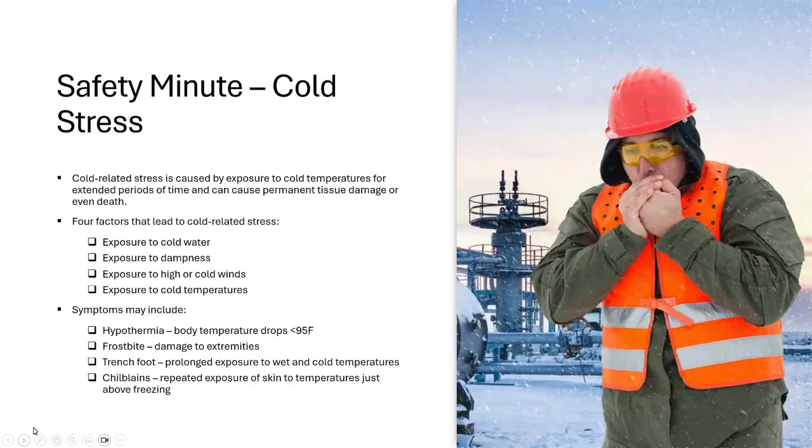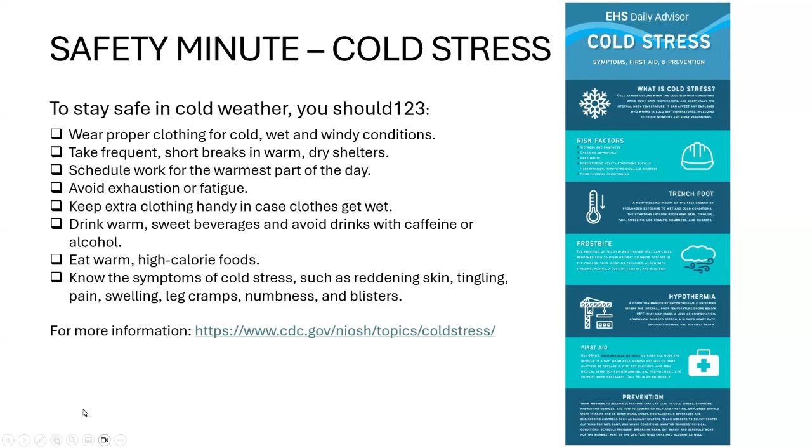Okay, so the Gowanus Canal is in the heart of Brooklyn. It's 1.8 miles long, and on average about 100 feet wide. It opens up into Gowanus Bay on one end and dead ends at the other end, which has always been an issue for the canal. So it is subject to tidal exchange, but it doesn't flow. It's not a complete flow-through system, so there is more potential for stagnation of water.

There are 7 bridges or viaducts that cross the canal, and it's generally been recognized as one of the most polluted bodies of water in the US, with a host of most of the types of contaminants you may have heard about, including volatile and semi-volatile organics, PCBs, pesticides, and metals.

There's an interesting history. The canal was created in the middle of the 19th century. Just a quick anecdote: a lot of people don't realize that Brooklyn wasn't always part of New York City. Back prior to the early 1900s, on its own, Brooklyn was the 3rd largest city in the US before Brooklyn and Queens became boroughs as part of New York City.

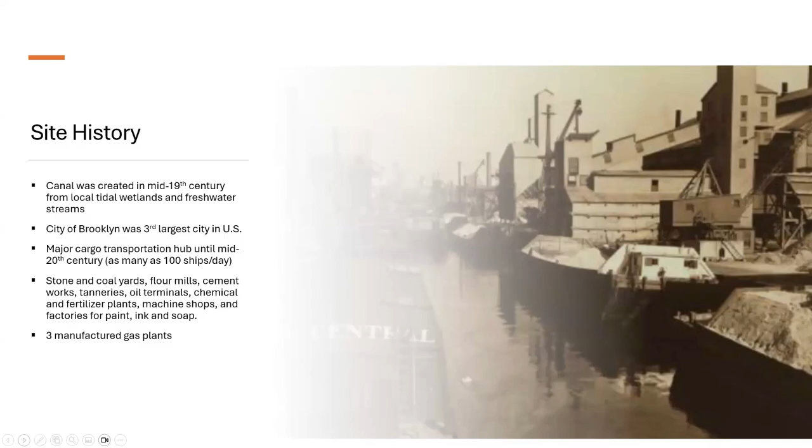Just a little bit more on the site history. Over 50 industries were located along the canal in 1942. There were 14 combined sewer overflows, or CSOs.

CSOs are associated with older sewer systems that you see in older cities, where the sanitary flow and the stormwater are not separated. So during rain events, you get a tremendous increase in flow through the system. It's too much volume for the wastewater treatment plants to be able to treat, so the flow goes over a weir and discharges untreated into a water body like the Gowanus Canal.

Over the years, from both the CSO discharges and the discharges from all the industry along the canal, the sediments in the bottom of the canal became quite contaminated, forming a gooey black colloidal mixture that is often referred to as black mayonnaise.

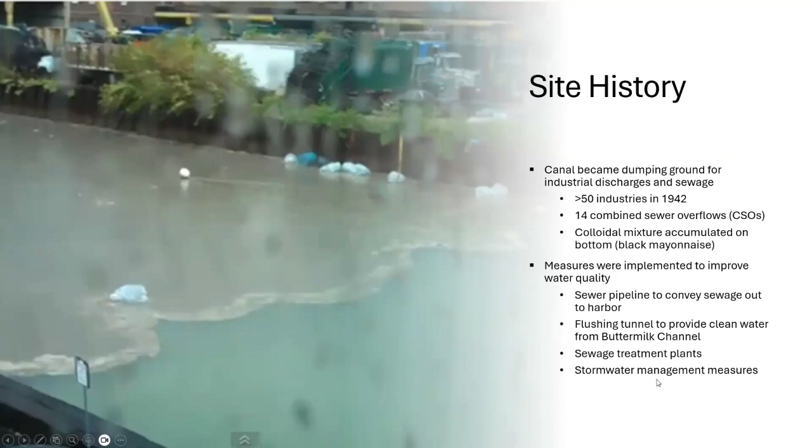Over the years, there were a number of measures implemented to improve the water quality. Sewers were put in to take sewage that used to go untreated directly out to the harbor. There was a flushing tunnel at the head end of the canal that was put in to bring clean water into the canal and help mix that in. There were upgraded sewage treatment plants constructed, and there were stormwater management measures implemented.

I'm going to move on to give you a sense of the regulatory status of the canal. In 2009, EPA proposed listing the canal on the National Priorities List under Superfund. For the next few years, there were investigations and feasibility studies conducted by EPA's contractors, which led to EPA issuing a Record of Decision in 2013 that lays out what the remedial measures are to address the historic contamination in the canal.

The canal was divided into three sections called Remedial Target Areas 1, 2, and 3, starting at the head end and working out to the bay.

The major elements of the remedy included dredging the contaminated sediments from bank to bank, stabilizing and solidifying non-aqueous phase liquids, which are primarily coal tar residues from the former manufactured gas plant sites, as well as possibly some other non-aqueous phase liquids resulting from historic discharges from industrial dischargers. That would be in the native material below the soft sediments after they're dredged out.

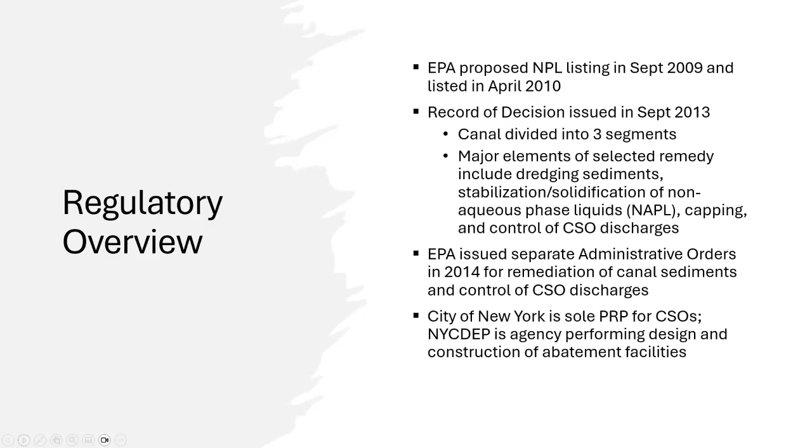EPA issued some administrative orders to implement the Record of Decision, and as I mentioned, the city is the lone responsible party for addressing the CSO discharges.

The remedy for the CSO discharges includes designing and constructing two large retention tanks. The concept being that when wet weather occurs and the flow through the combined sewers is too great for the treatment plant to handle, rather than the excess flow being discharged untreated into the canal, it'll be rerouted into these large holding tanks.

Once the rain subsides and the treatment plant has the capacity to take the additional flow and treat it, it can be bled back off from the storage tanks and sent to the treatment plant.

The remedy called for two tanks: an 8 million gallon tank near the head end of the canal and a 4 million gallon tank around the midpoint of the canal.

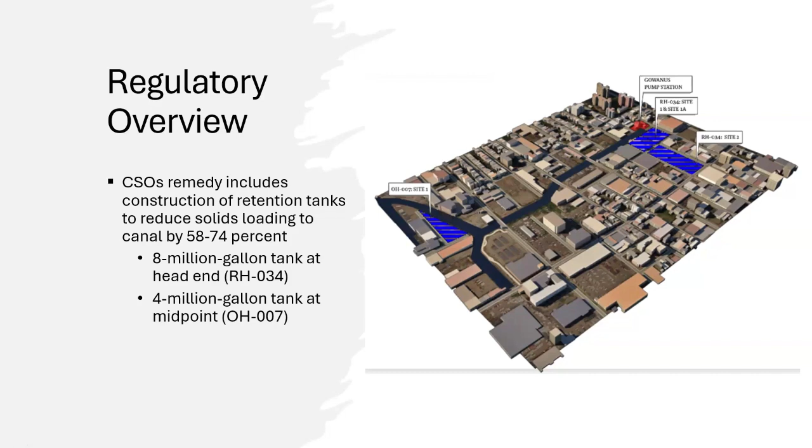From here on out, I'm going to focus on the head end facility, which is further along in the design and actually partway through construction now.

The DEP entered into a consent order with EPA in 2016 that laid out specific milestones for design and construction of the remedy at the head end, which is referred to as the RH034 facility. That's just the designation of that CSO outfall.

As I mentioned, there were stipulated milestones for design submittals, for the city to acquire land as necessary to build the facility, and to implement the required remedy.

It turns out that the preferred site for this facility is on the location of one of the former manufactured gas plant sites. National Grid, the current utility, has responsibility for cleanup of the former MGP sites.

So they are working with the state agency, the Department of Environmental Conservation, to perform remediation for the former MGP site. Some of the activities between the CSO facility and National Grid's remediation overlap, adding complexity to the project. The parties had to cooperate and work together on various elements of the project.

Going to quickly walk us through the design process. The New York City DEP has a very SOP-driven, very detailed design process, as you could imagine, for these facilities that are going to be put into use to protect the public and are going to last for 100 years or more.

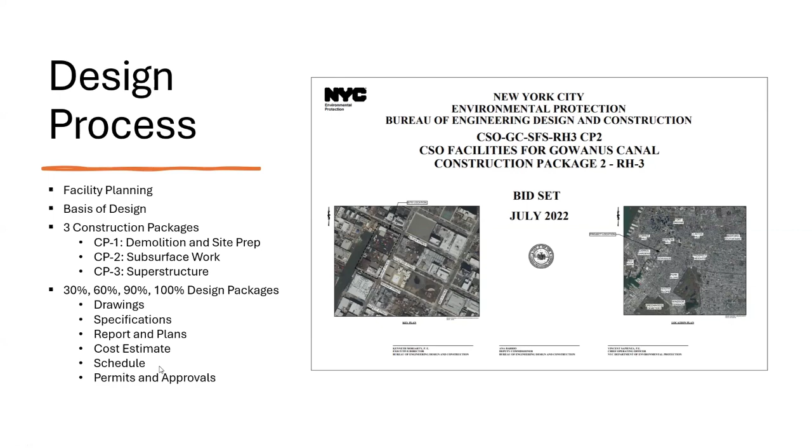So the goals of the project were developed early on, and that included designing the facilities to be compliant with regulatory requirements, making them safe and efficient to operate, making sure that the facilities are consistent with the character of the neighborhood and meet the desires of the community stakeholders, and then to design them to be sustainable and to meet today's requirements for sustainability, which I'll be talking about more as we get further into it here.

So the reason it's designed in sections rather than just being one large tank is that the majority of the flows during a given year might only be enough to fill the first or the second chamber, and therefore it reduces the maintenance requirements rather than letting the entire tank fill up every time that there is an overflow into the tank.

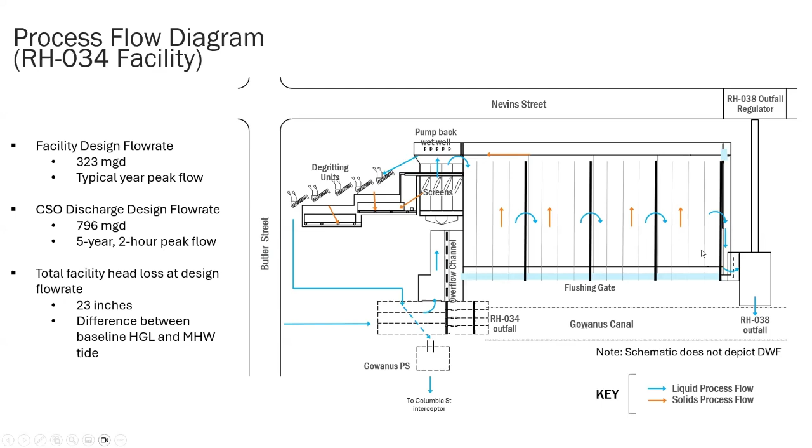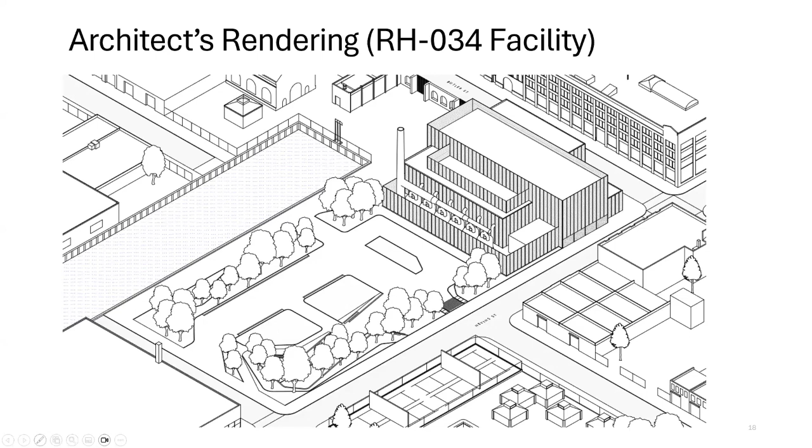And this is another artist's rendering. You can see the brick structure tying into the existing pump station and trying to be consistent with the character of the neighborhood.

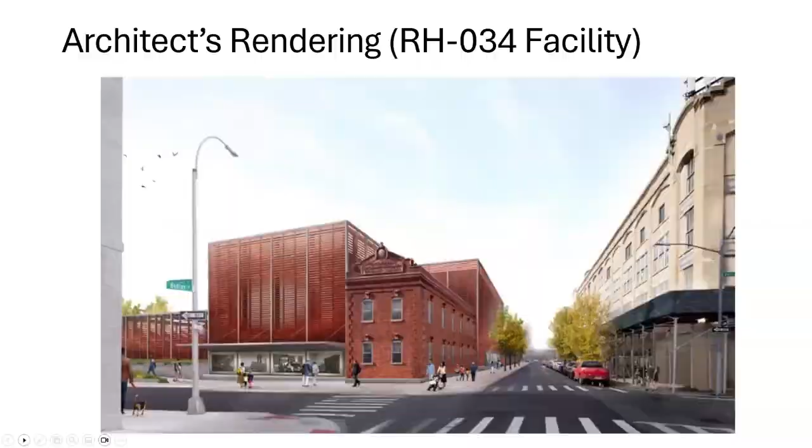All right, so going to quickly go through the remediation scope here. In order to construct the tank, it is necessary to first build a support of excavation before the mass excavation can be performed and the concrete can be poured to construct the tank. We call a support of excavation an SOE. In this case, it's a slurry wall construction that goes all the way down 200 feet and ties into the underlying bedrock. And then it also forms the outer walls of the tank when it's constructed after the slurry wall is completed.

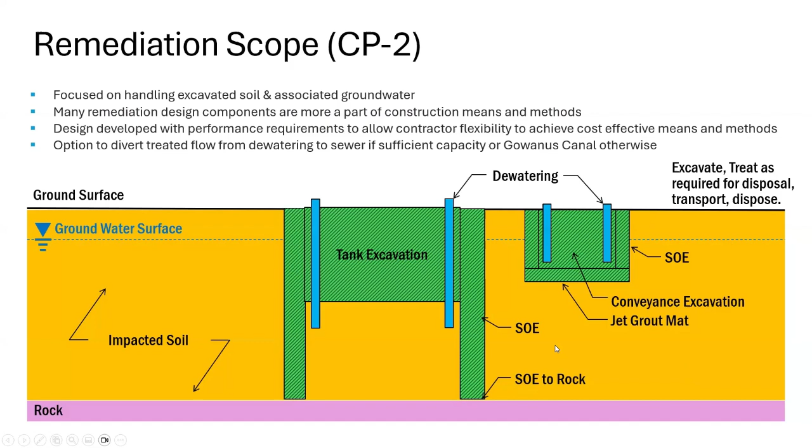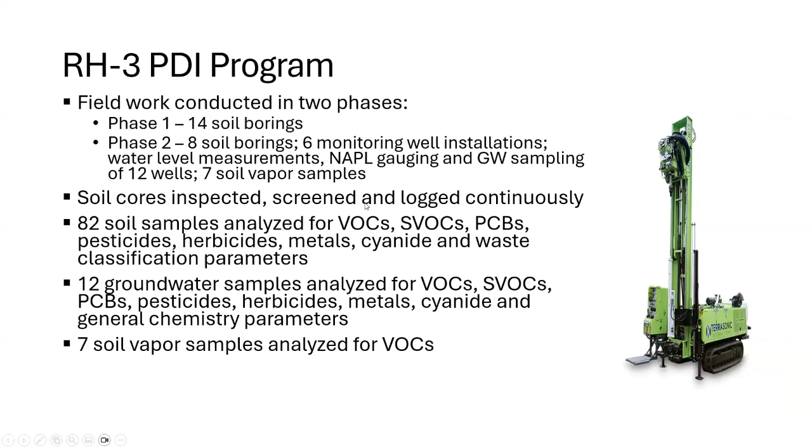We're working on a contaminated site, so we're surrounded by impacted soil and contaminated groundwater that has to be managed. So it's not your everyday construction project, to say the least. So we first conducted a pre-design investigation that was a fairly extensive investigation to characterize the contamination in the soil, groundwater, and soil vapor. The main constituents are material associated with the former manufactured gas plant site.

So if you've never seen coal tar, it's similar in some respects to the creosote that you see used to treat telephone poles. Very thick, viscous liquid that was generated in large quantities by these former MGP sites, and much of it ended up in the subsurface and in water bodies, back in the days before we had the sort of environmental regulations and best practices that exist today.

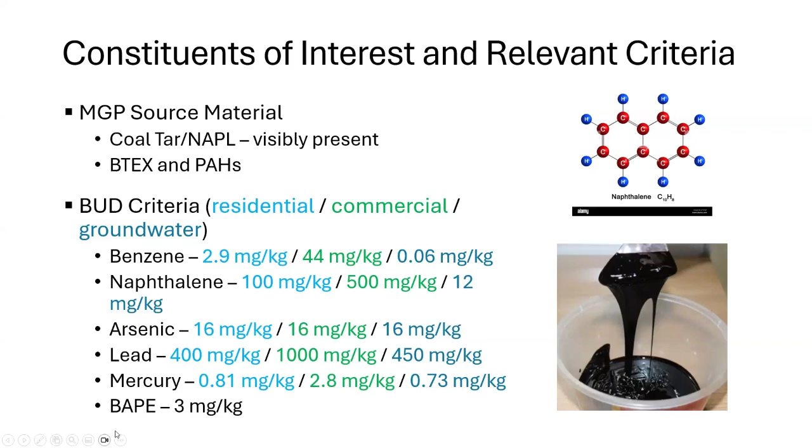The light blue being the most stringent criteria that would have to be met for the soil to meet residential use criteria. The green would allow for commercial use, and the darker blue here is for protection of groundwater. And I'll just keep moving through here so we have enough time.

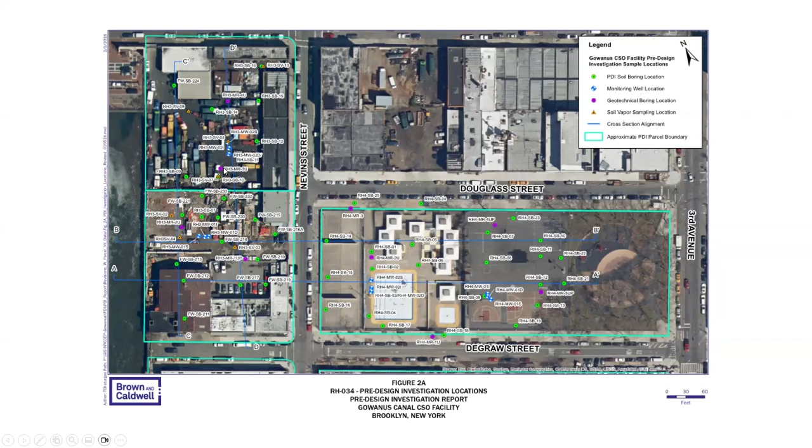to acquire it. However, DEP was very reluctant to take over the park in order to build this facility, because it was the only park anywhere nearby in that part of Brooklyn. And in order to acquire that property for the facility, they would have had to find a new location and build a whole new park with a new public swimming pool and all the facilities and such. And ultimately, DEP was able to acquire the preferred parcel, and we were able to focus the rest of the work on that location.

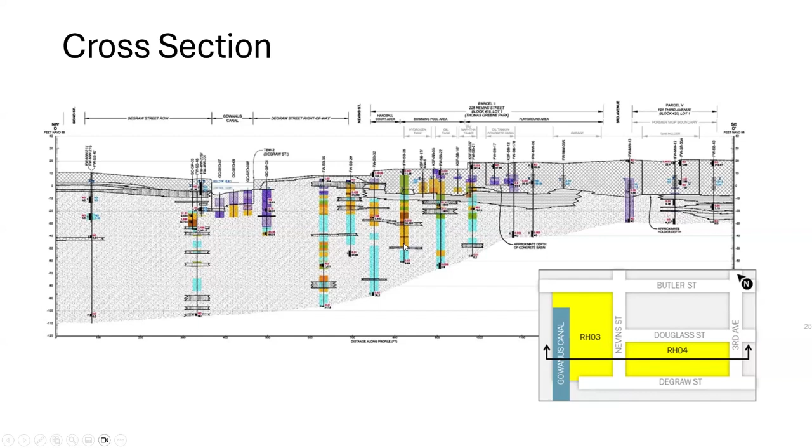This is just a cross section that shows the contamination in the subsurface. The darker reds and browns are where we encountered separate phase product, coal tar from the former MGP operations. And then the contractor, when mobilizing to the site, had to do their own additional investigations. So they drilled borings all around the perimeter of the tank where the support of excavation would be constructed. And you can see the red locations are where coal tar was encountered. So mostly concentrated on the southern end of the site, not so much on the northern end of the site.

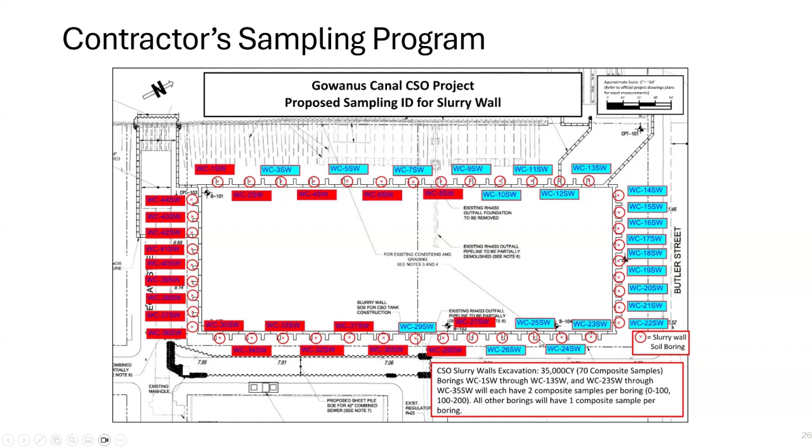And then they also gridded the interior where the soil would be excavated to construct the tank. And similarly, southern end of the site, most of the locations showed the presence of coal tar, whereas the northern part of the site did not.

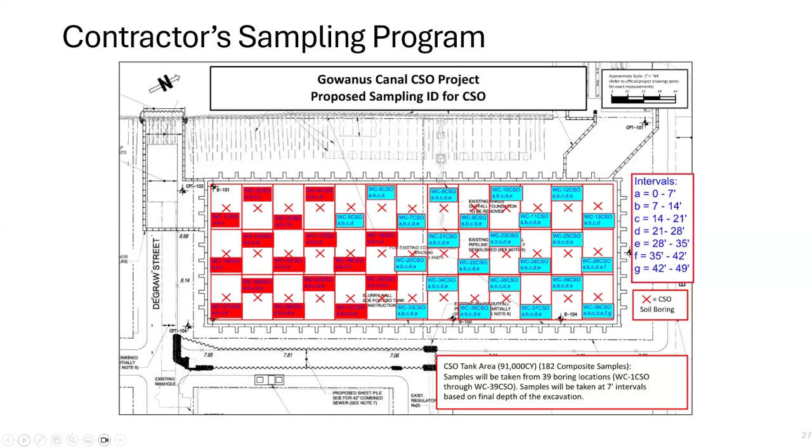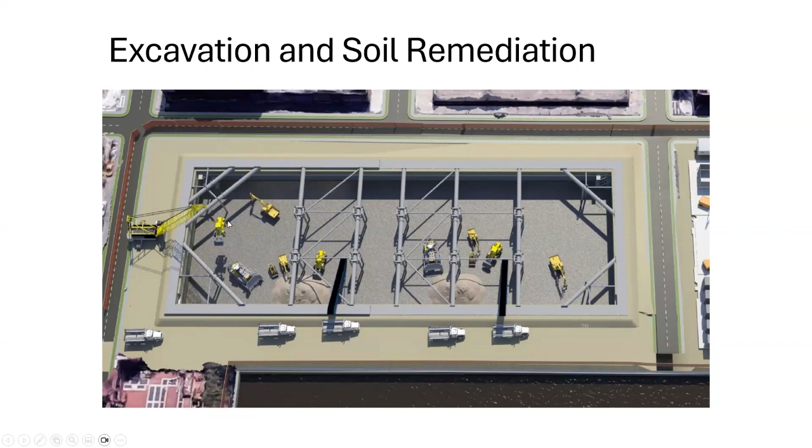We did some 4D modeling and looked at the feasibility of implementing the construction and how it would need to be done. This is just a still shot from that. You can see part of the design of the support of excavation includes this bracing, these cross-lot struts. So another complexity is having to work within these constraints to work down in the area and to do the excavation and to get the soil up out of the excavation.

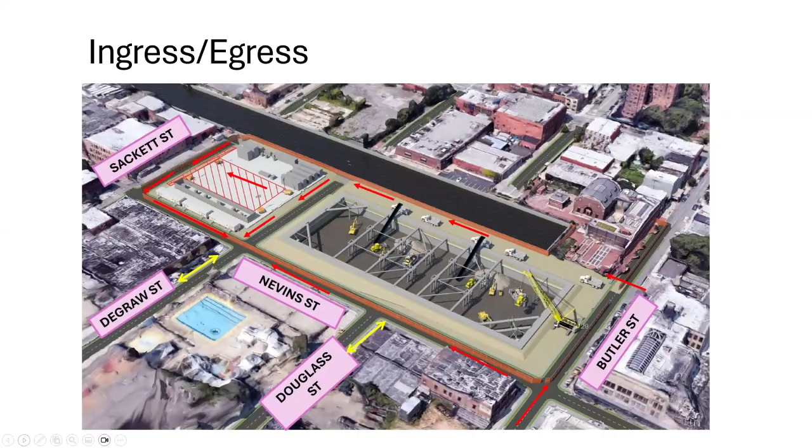And this just shows kind of the flow around the site, so the excavation work would be occurring in here. Trucks would enter along the side of the canal. There's a soil staging area over here. So all those logistics had to be worked out. It's a very congested part of Brooklyn. The streets are narrow and filled with parked cars, and very difficult for construction equipment and dump trucks to get in and out of the site.

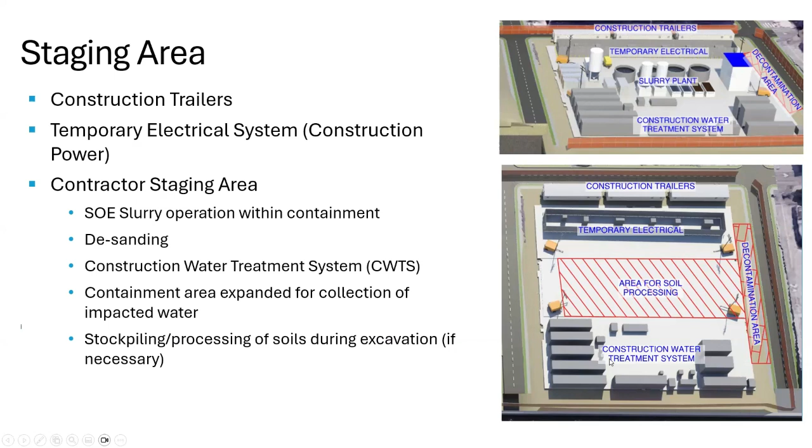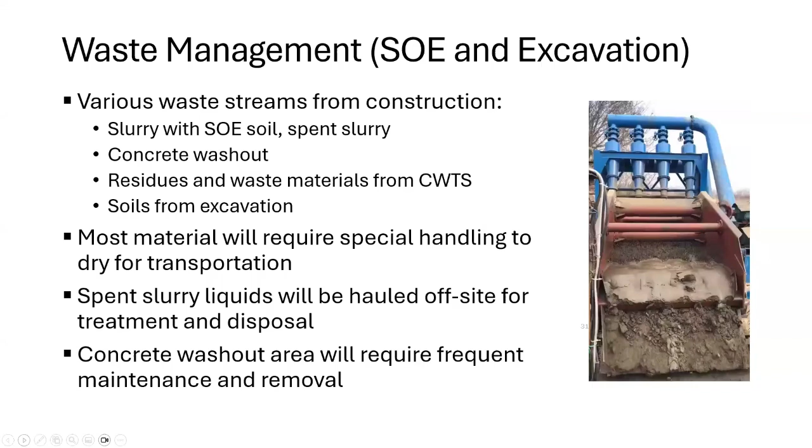That's just a picture of what the spent slurry looks like coming off of the slurry desanding unit. The slurry gets recycled. It's used to keep the trench open while you're digging and constructing the support of excavation, and eventually the spent slurry needs to get disposed of. So part of what we had to plan for was managing these various waste streams. Most of the material requires special handling to dry it before it can be transported off site. And I'll talk more about that when I get into the sustainability section shortly, but we looked at a lot of options for potential reuse of the material, avoiding putting it in landfills if at all possible.

So that's kind of everything leading up to here, where I want to talk now about some of the sustainability considerations. So there's actually quite a bit of supporting local laws and plans and guidance in New York City for sustainability. There's requirements from the mayor's office, PlaNYC 2030 and OneNYC.

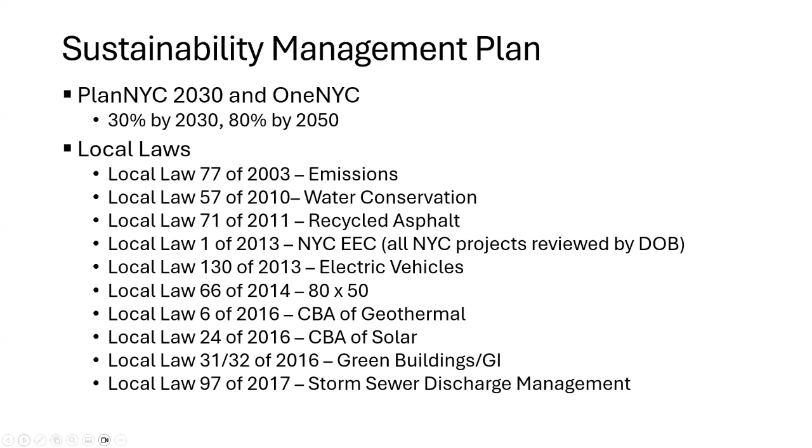There's a number of local laws that deal with emissions from construction equipment, water conservation, recycling of materials, utilization of electric vehicles, renewable and more sustainable forms of energy and the like. And then BEDC, which is part of New York City DEP, it's the Bureau of Engineering, Design, and Construction, has their own standard operating procedures.

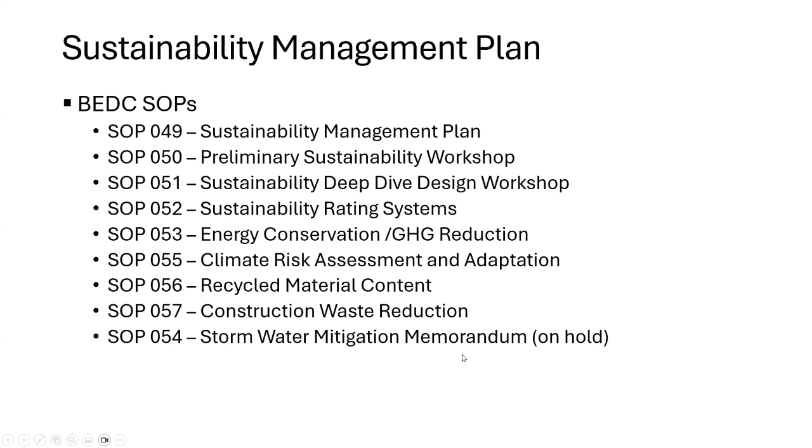So every project needs to have a sustainability management plan prepared. That plan gets workshopped with all the various stakeholders. There's rating systems. There's certain requirements for energy conservation, climate adaptation, use of recycled materials, reducing waste, stormwater mitigation. So some of you may be familiar with the Envision program, which is very popular these days. There's also LEED, which is similar. Envision seems to have gained a lot of popularity recently.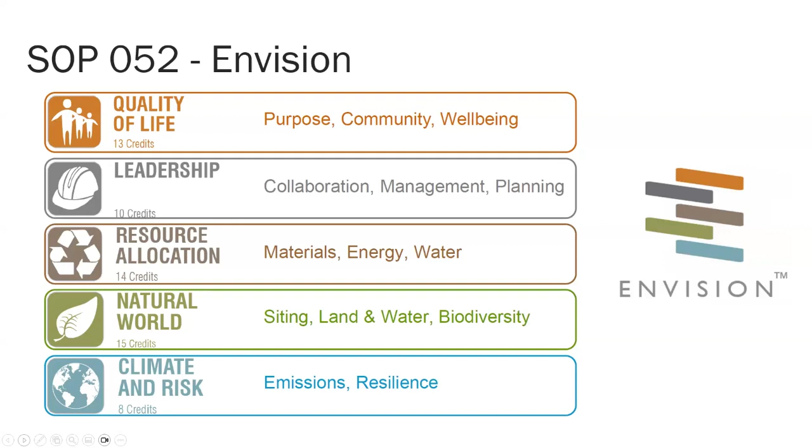So that's a tool for evaluating and rating the social, economic, and environmental benefits of all types of civil infrastructure projects. So it provides a framework, and you can get designated at certain levels of recognition based on how many credits you're able to attain for your project. And the DEP follows that, implements that program, and the design of the facility looked to acquire as many Envision credits as possible, I believe going for gold certification.

There was also, and this pertains to the fact that the facility is being constructed on a Superfund site, EPA's clean and green policy, and that policy, which applies to any remediation projects, establishes preferences for using renewable and conserving and efficient energy and Energy Star equipment, using cleaner fuels and clean diesel technologies, water conservation approaches, sustainable site design, reuse and recycling of material where feasible, environmentally preferable purchasing, and looking at minimizing greenhouse gas generation.

Some of the construction-related considerations were looking at energy and water use during construction, minimizing impacts to the neighborhood in terms of noise, odors, traffic, impacts during transportation, impacts during treatment of any of the material, and then final use of the material where it's possible to reuse or recycle material.

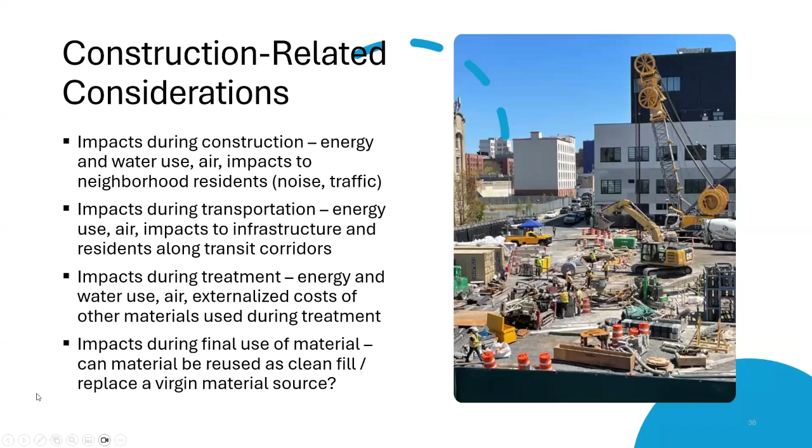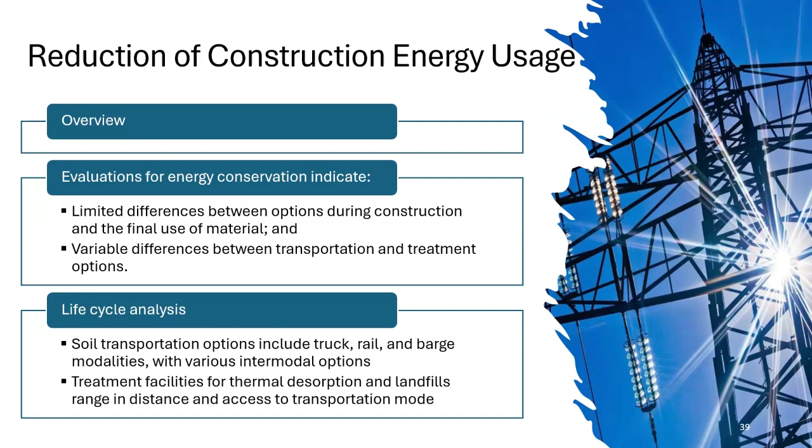There were a number of evaluations that the team conducted. Some of what we found was there were limited differences between the options for energy conservation. There were some more significant differences looking at transportation and treatment options. We did a life cycle analysis of soil transportation and treatment options and looked at the sort of pros and cons of potentially transporting material farther away in order to treat it further so that it could be reused, and which options had a greater carbon footprint than others.

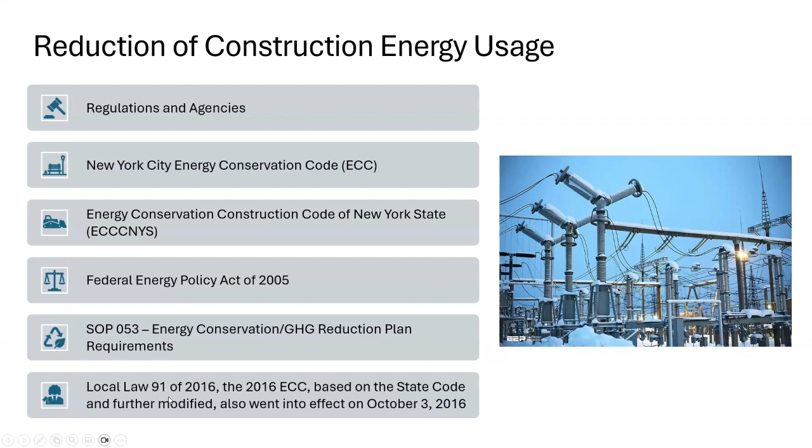This is just another slide that shows some of the regulations and agencies that have a role in reducing energy usage. So New York City has energy conservation codes, for example. There's federal agency energy policies. The DEP has its own standard operating procedures, and then New York City has local laws, which I mentioned previously.

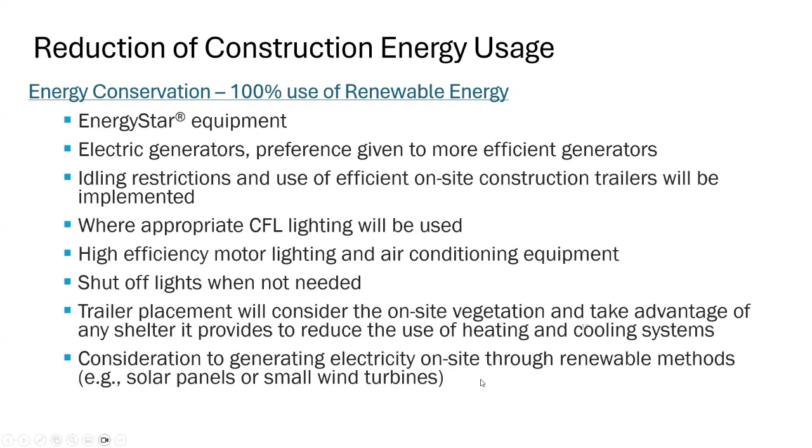So we're including requirements in the project specifications for use of Energy Star equipment, preference given to efficient generators, restrictions on idling of trucks and equipment, lighting preferences, efficiencies of lighting and air conditioning equipment, shutting off lights when not needed, where trailers are placed, and even consideration to generating electricity on site if determined to be feasible.

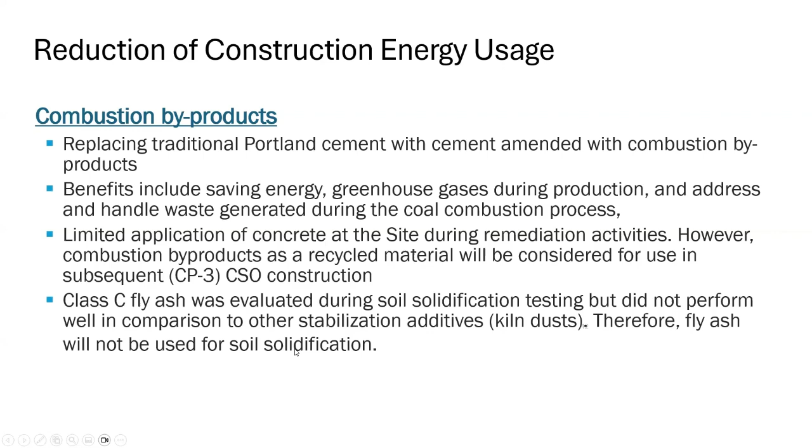We also looked at combustion byproducts, potential to replace traditional Portland cement with amendments that reuse things like fly ash and other products. Benefits from saving energy, reducing greenhouse gases, limiting the need for concrete at the site. And again, I mentioned here fly ash, kiln dusts, other materials that can be used for stabilizing, solidifying soils as necessary to reduce free liquids before they get put in trucks and sent off site.

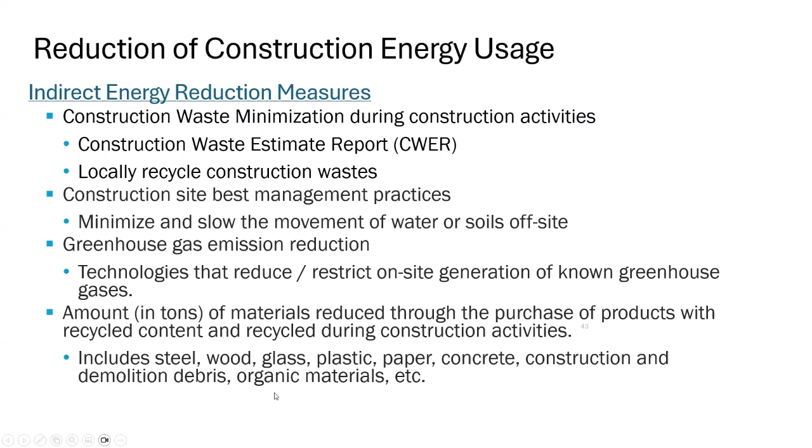And then there were indirect energy reduction measures, like one of the DEP's SOPs requires a construction waste estimate report, and then tracking of the waste generation and how it's managed during construction, looking at recycling locally construction wastes as feasible, other best management practices, minimizing greenhouse gases, looking at increasing the purchase of products that have recycled content. So the greater use of products with recycled content, such as some of the products that are listed here.

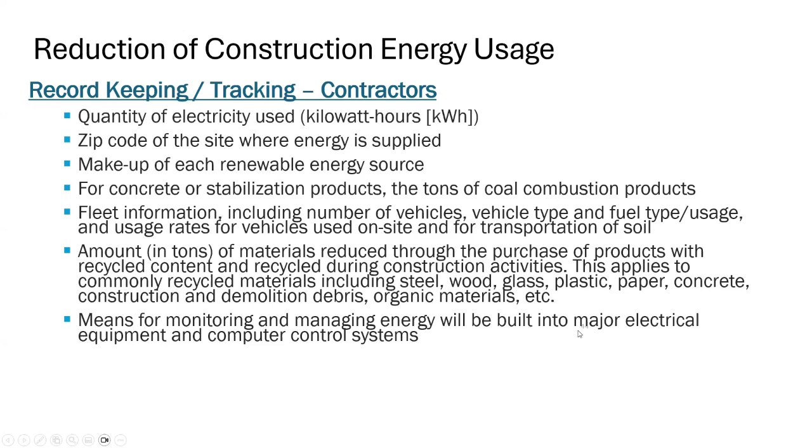The specs require the contractor to keep records of all of these items, including electricity usage, makeup of any renewable energy sources, use of coal combustion products, information on fleets and vehicles, various other requirements here. Monitoring and managing energy, how that's built into the equipment and the computer control systems.

Soil management considerations: again, we look to promote reuse if at all feasible. Need to consider how does that impact the project schedule, community impacts, cost, complying with the applicable regulatory requirements. The New York State DEC has regulations that need to be met in order to reuse materials from a contaminated site, and it's a pretty detailed process that you have to go through, and there's certain types of reuse that are allowed based on the amount of contamination that may be present in the material.

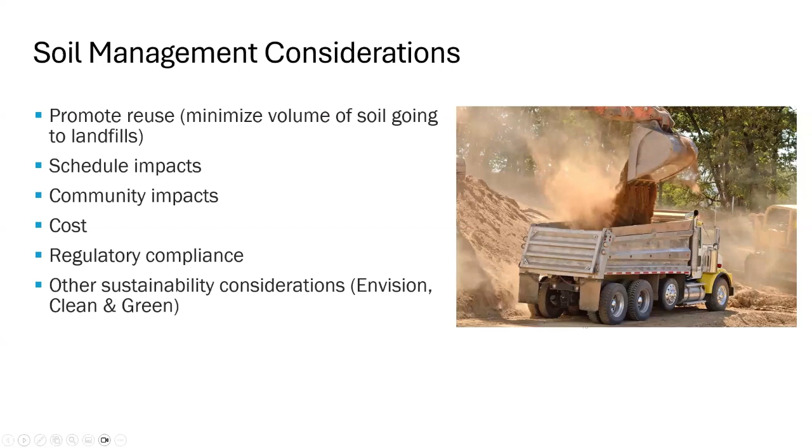We determined we would have about 140,000 cubic yards of soil excavated. The possible reuse scenarios included reuse as general fill. That might be possible for some of the lesser impacted materials, like on the northern part of the site and in the shallow soils that were not as contaminated. There is a possibility of sending soil off to thermal treatment facilities that will heat up the soil and drive off volatile contaminants and allow the treated soil to then be beneficially reused.

There's also restricted and limited use fill that sometimes can be used as subgrade in construction projects. For example, if it's going to be paved over or a cap is going to be placed over it so that public and ecological receptors wouldn't be exposed to the underlying material. And then kind of least preferred is sometimes moderately impacted material can be used as daily cover at a landfill. So rather than being buried in the landfill, it can be beneficially reused as material that they need to cover the waste that's disposed on a daily basis.

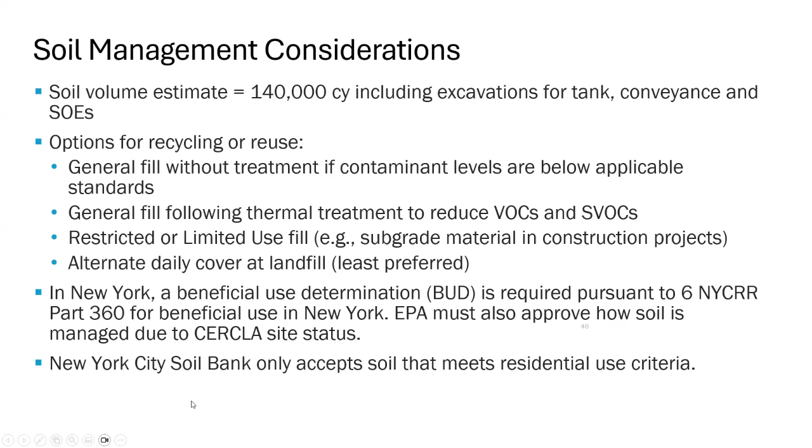So as I mentioned, DEC has regulations that spell out all the requirements that need to be met for beneficial use. New York City also operates a soil bank that accepts soil that meets residential use criteria. Unfortunately, we weren't going to have much or any of that for this site, so we weren't able to take advantage of the soil bank.

Try to get through the rest of it here. I think I'm close to the end.

Factors influencing treatment and reuse options: contaminant levels and types, the physical property of the soil. Obviously, it has to meet the physical needs of how it's going to be reused. The ease of segregating soils as you're going through the excavation process. You can only do so much sort of surgical removal of soils to separate soils that are clean enough to be reused from the more contaminated. At some point, it becomes impractical. And then the availability of the facilities and potential reuse sites at the time that the project is being constructed. And we also looked at various transport locations and pros and cons and the relative sustainability of trucking versus barging versus use of rail.

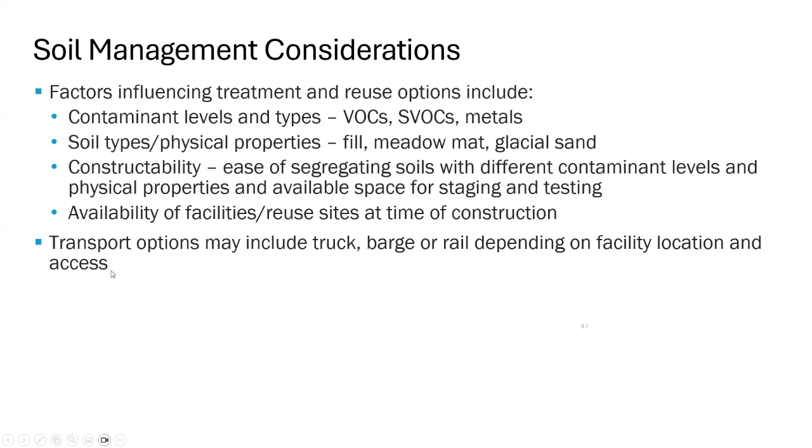I won't go through this in detail, but you could kind of get an appreciation for the complexities in evaluating these reuse options for the soil. First determining, is it a hazardous waste under RCRA or not, and then looking at further details as you work your way through the chart, and then also looking at the pros and cons of the various transport options.

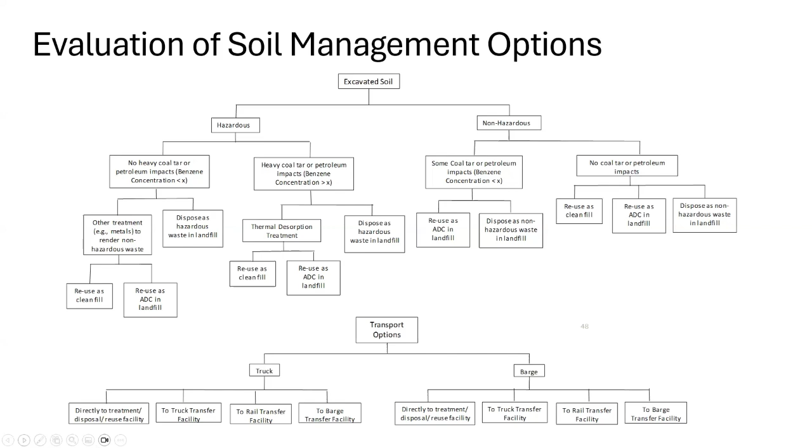We did this life cycle analysis, and we found that there's quite a bit of energy used and greenhouse gas emissions associated with sending soil off for thermal treatment in order for it to potentially be reused. So from a sustainability standpoint, it really didn't pencil to send the soil off over a long distance, use a lot of fuel, generate a lot of emissions, then send it through a thermal treatment process and then bring it back to some location to be reused. So we kind of ruled that out.

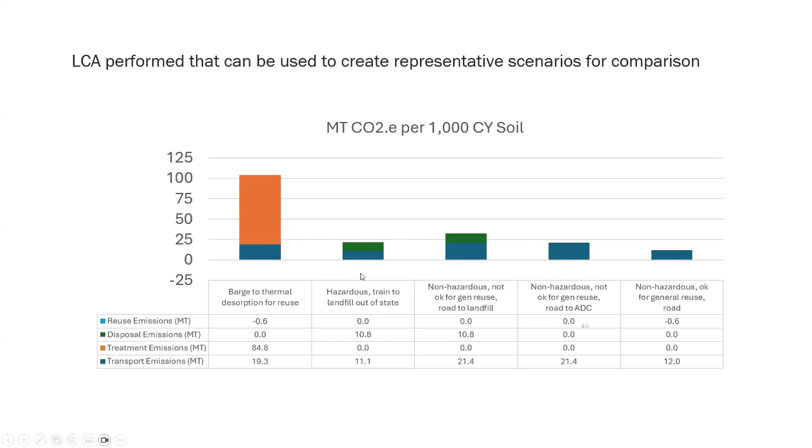And we looked at other treatment options based on the relative contamination levels of the soil through that process. That's just another refined analysis that was done. So, looking at the different transport and treatment and disposal and reuse options to see which was the most practical for the project.

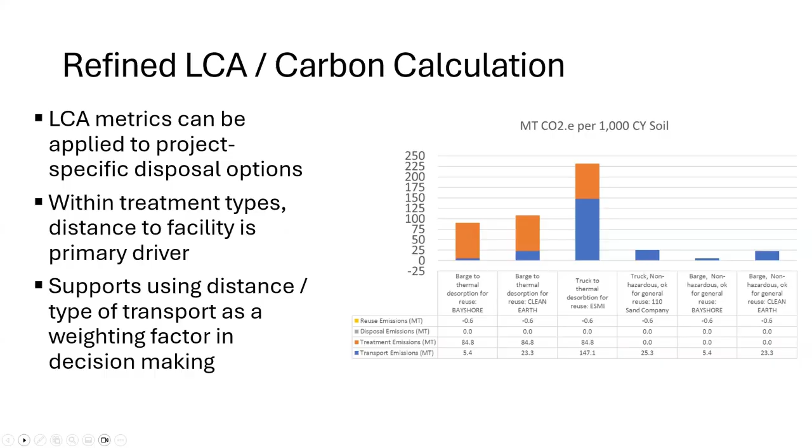And that's really the end of the presentation, other than some photographs I have if there's time to show them. But let me pause here, because I think we're just about right on time. Yeah, you can show the photos and then we can start the Q&A.

Okay, it's a very interesting project.

Okay, thank you. So the second phase, the CP2 part, which is the subsurface work to construct the support of excavation and then excavate down into the subsurface soils and form the underground tank, is happening right now.

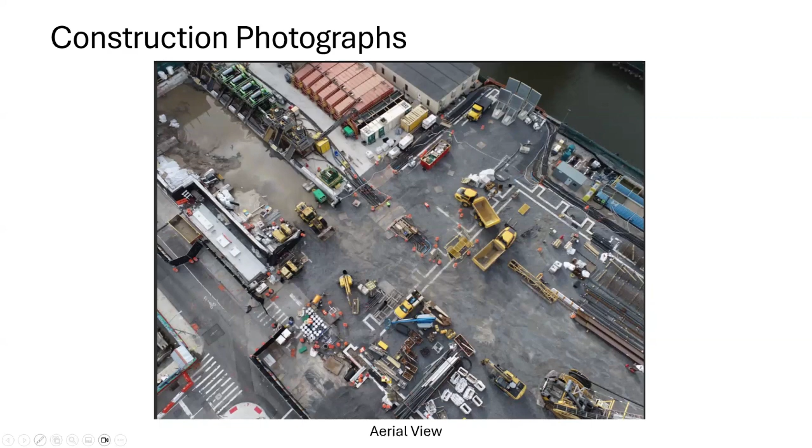This is a view taken from the roof of an adjacent building. You can see all the cranes and equipment on the site, and it looks even more congested in this photo.

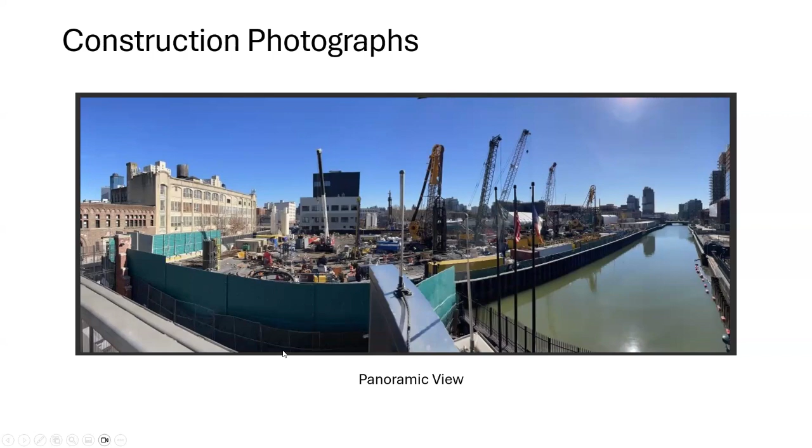Here you can see the dredging going on in the canals. That was one of the considerations when we looked at potentially barging material off of the site, because at face value you might say, you're right next to a canal, instead of trucking, why don't you barge it? But there was going to be all this remediation work going on in the canal at the same time, and then you have issues with all of the bridges and having to open and close drawbridges and the effect on traffic and everything. So there were a lot of hurdles to overcome in order to make barging work.

So at the end of the day, we did end up trucking for the most part.

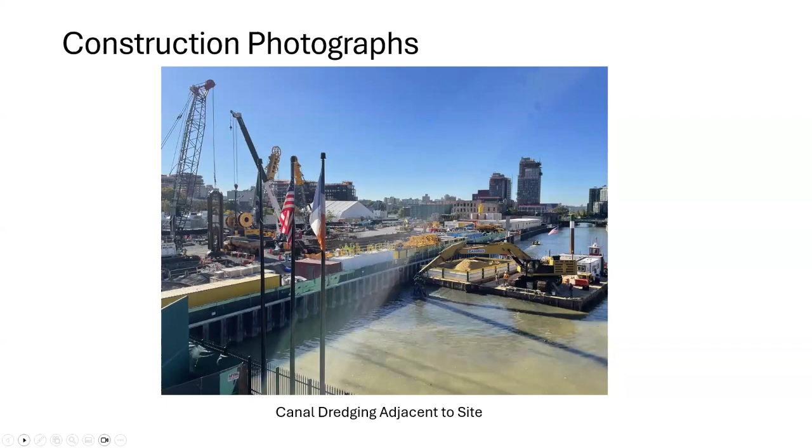These are noise sound barriers being erected. This is the guide wall - this is for the support of excavation to be constructed. The first step is to construct this guide wall, and then the SOE will be built in panels. You can see they're kind of measured off.

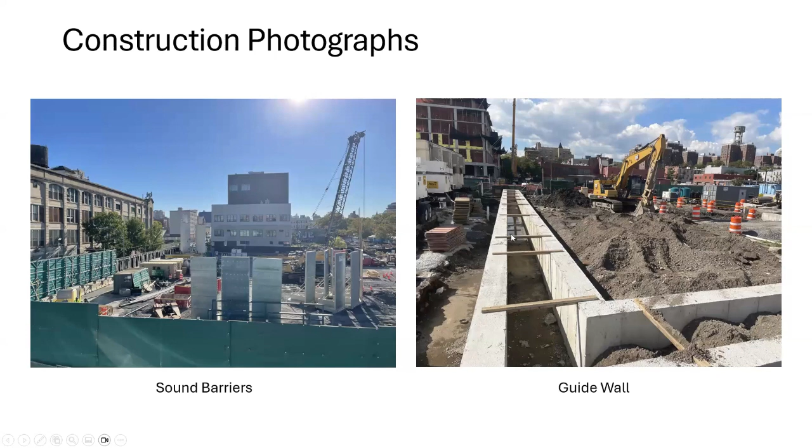And then you can see in the next phase, this is the clamshell that was used to excavate about the first 70 feet to construct each panel as part of the perimeter support of excavation.

On the right here, this piece of equipment is called a hydromill, and you can see it has these two cutter heads on it. This is capable of being extended to great depths and even to excavate into the upper surface of the bedrock, so that the slurry wall could be keyed into the bedrock.

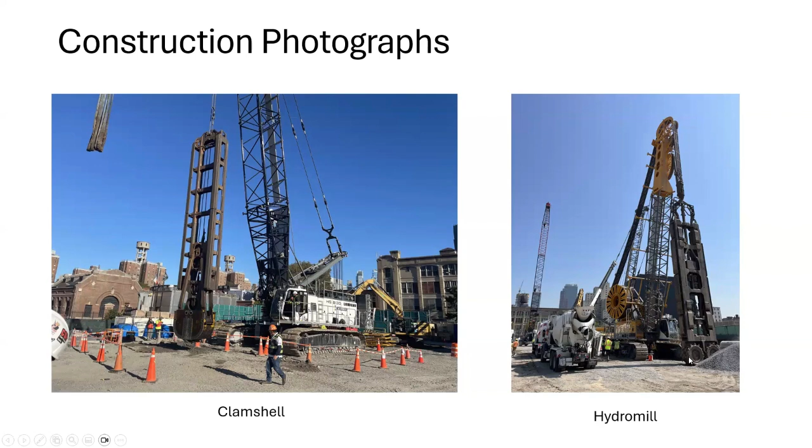This is the slurry plant here, and on the right, this is the desanding unit. The slurry is a mixture of bentonite, which creates a more viscous material that is pumped into the excavation, and it serves to keep the excavation open so it doesn't collapse during the soil removal part. As the slurry gets too much sediment in it, it goes through this desanding unit, which removes the solids, and then it's recycled back and used again.

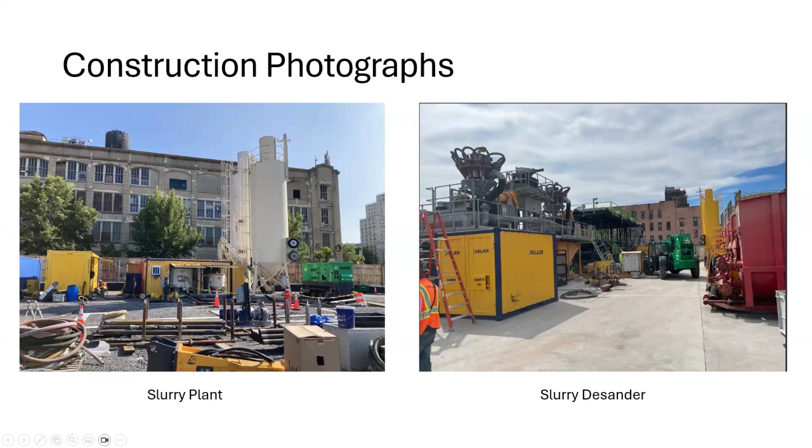Here you can see this tent or sprung structure that was constructed over the desanding unit, because we found there were a lot of odors coming off of it from the coal tar. So a tent was placed over it, and blowers were put in to create negative pressure and remove the air, which was then run through carbon filters to remove the contaminants and reduce the odors.

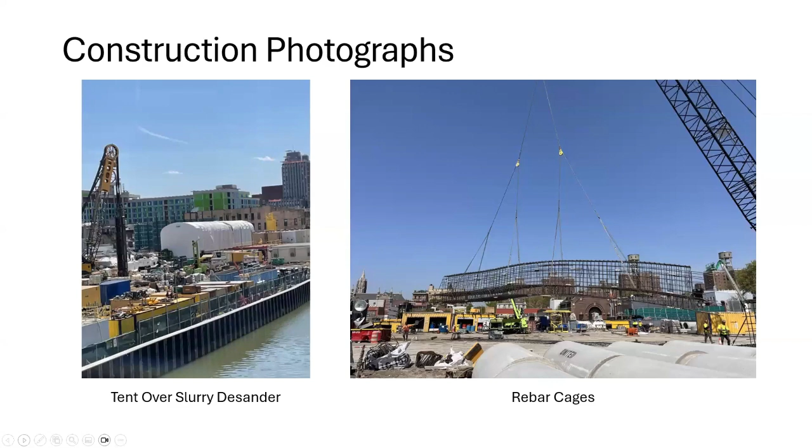This is the rebar cages that get lowered into each panel for structural support for the support of excavation - pretty massive structures to put together. Here's a concrete pour.

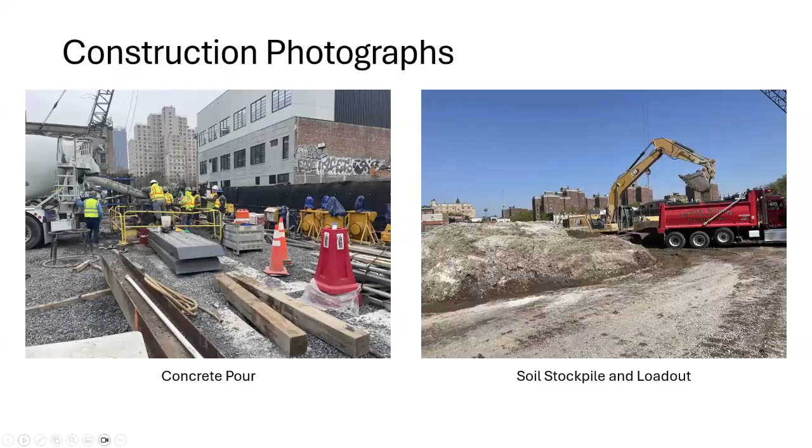So I think that's about the end of what I had to present. I hope I didn't go too fast, and I hope it was of interest, and I'd be very happy to discuss further and answer any questions that I can.

Yeah, that was an excellent presentation. You packed a lot of information there, Jeff, but very interesting project. So just for everyone, like Khalid...